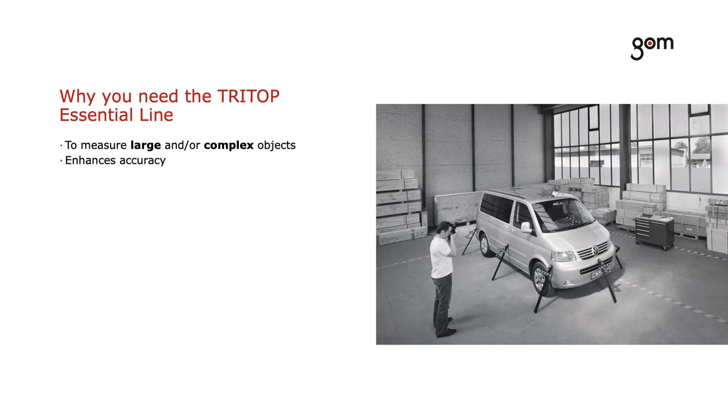in GOM Inspect. Now, before getting into the practical details, let's have a quick look at why you need the TRITOP Essential Line. You need photogrammetry primarily to measure large and complex objects, which is what this series is about. Besides that, photogrammetry also enhances accuracy. Now, back to large and complex measuring objects.

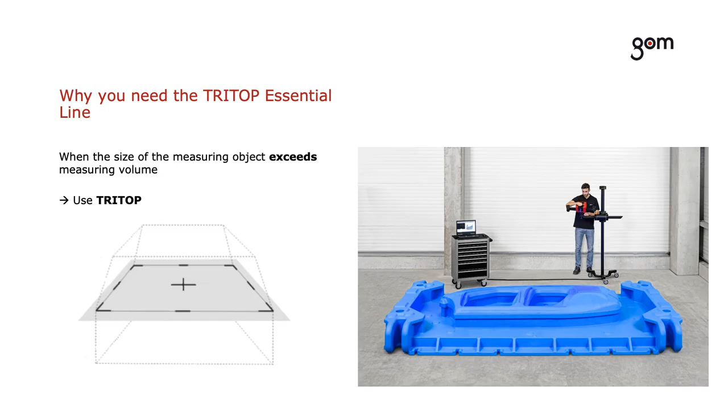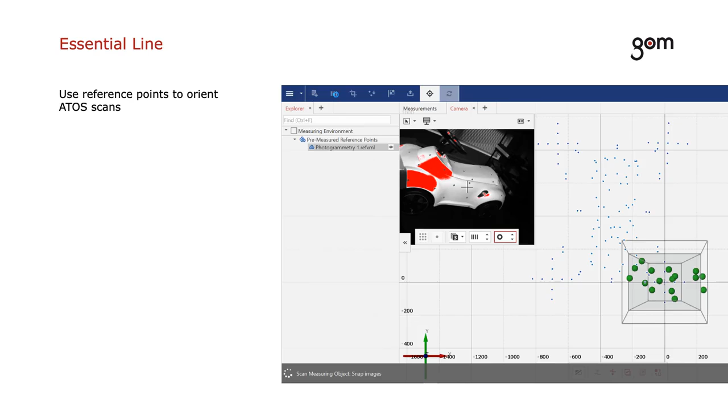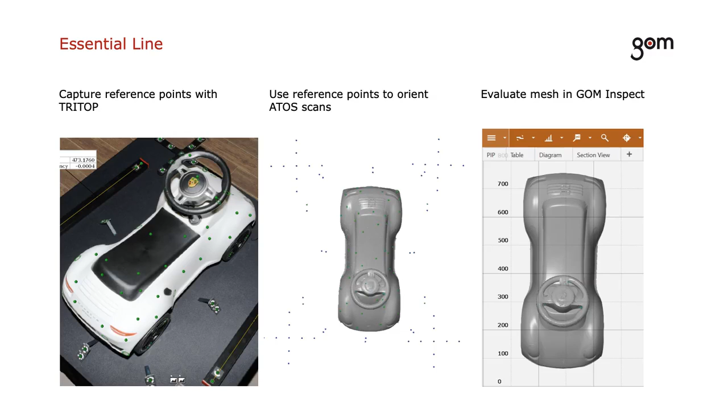As you know, all ATOS sensors have a set measuring volume. When the size of the object you want to measure exceeds this measuring volume, photogrammetry comes in. You can use photogrammetry to capture reference points. You'll then use these reference points to orient ATOS scans in order to digitize large measuring objects. Once you have scanned your object and created a mesh, you can export it and evaluate it in GOM Inspect.

Okay, so let's take a closer look at the photogrammetry part, the TRITOP Essential Line. The TRITOP Essential Line is an optical measurement system consisting of a photogrammetry camera and the TRITOP Basic application software. To gain a better understanding of what the TRITOP Essential Line is, let's have a look at how it works.

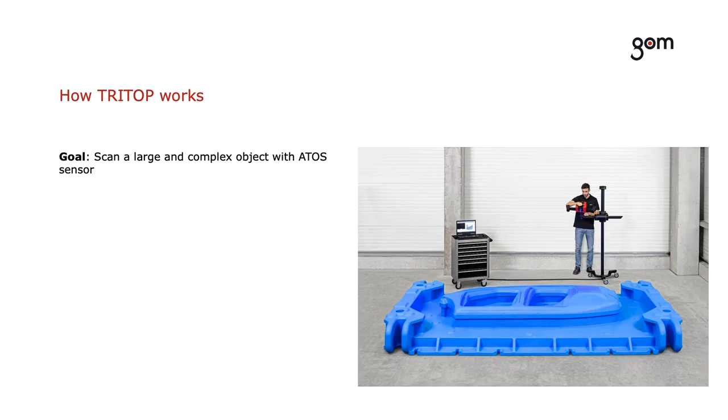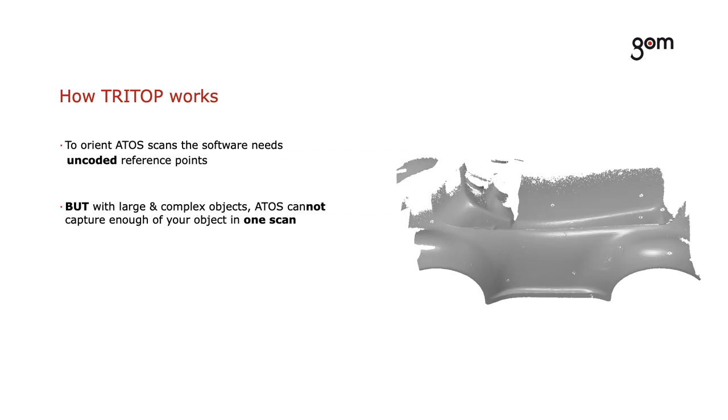Your goal is to digitize a large and complex measuring object with ATOS. To do that, you need to scan the different surfaces of your object. In order to display the object in its integrity, the software needs to orient these scans. That's why you need uncoded reference points. However, when you measure large and complex objects, you cannot capture enough uncoded reference points in a single ATOS scan for the software to orient your scans. That's why you need TRITOP.

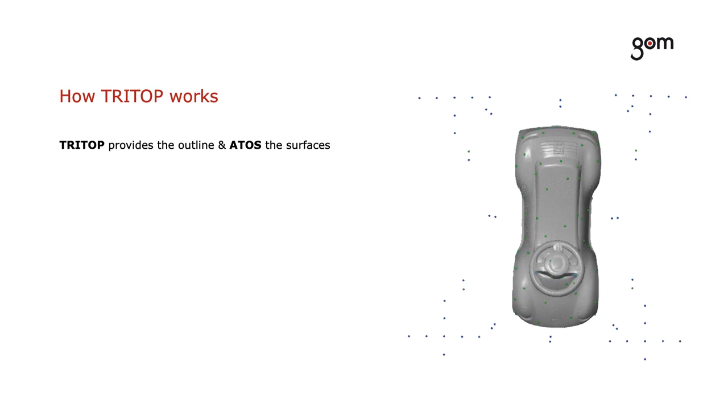With TRITOP, you can capture all the uncoded reference points on your measuring object and their relation to each other. You can then use this point structure that you captured with TRITOP to orient your ATOS scans. So basically, TRITOP provides the outline and the ATOS scans fill in the surfaces of your object, allowing you to digitize it.

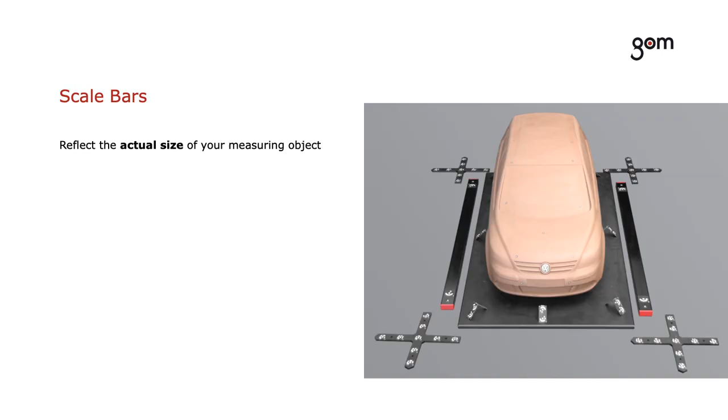Now, in order to measure an object with TRITOP, you need uncoded reference points, high precision scale bars, and coded reference points that are positioned on and around your measuring object. The scale bars allow the software to determine the actual size of your measuring object. The explanation for the reference points is a bit longer, so bear with me.

When you capture images with a photogrammetry camera, what you really do is capturing reference points. The software then computes the exact 3D coordinates for these reference points on your measuring object. The coded reference point markers allow the TRITOP Basic software to orient all the photogrammetry images you captured. The software can identify the coded reference points in all the different images and determine their fixed relation to each other.

Now, the uncoded reference point markers reflect points of interest on your measuring object and will be the same points you'll use for your ATOS scans. After computing their 3D coordinates in the TRITOP Basic software, you can export them and use them in GOM Scan to orient your ATOS scans.

Okay, let's briefly sum this up. The Essential Line uses TRITOP, which consists of a photogrammetry camera, scale bars, coded and uncoded reference point markers, and the TRITOP Basic application software. It also uses GOM Scan, which requires an ATOS system to digitize, and GOM Inspect to evaluate large and complex measuring objects. You will use TRITOP to capture 3D points on your large measuring object.

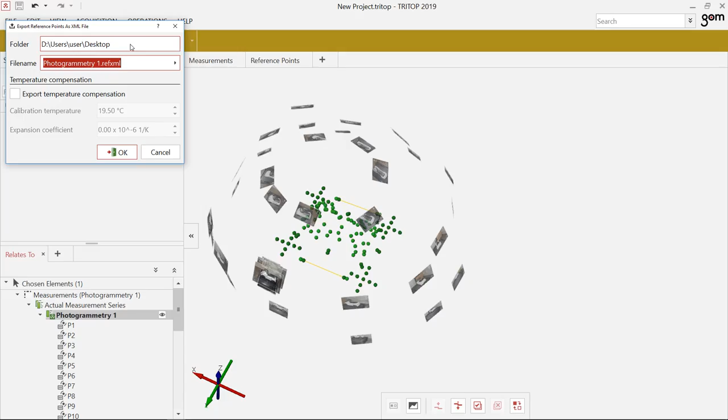You can then export these 3D points and use them to orient the ATOS scans you captured with GOM Scan. This allows you to digitize large and complex objects with your Essential Line products. As a third step, you can use GOM Inspect to evaluate the mesh you've created in GOM Scan. As you can see, we'll be working our way through photogrammetry, scanning and polygonization, down to inspection using the Essential Line system. The Essential Line provides great flexibility and countless functionalities.